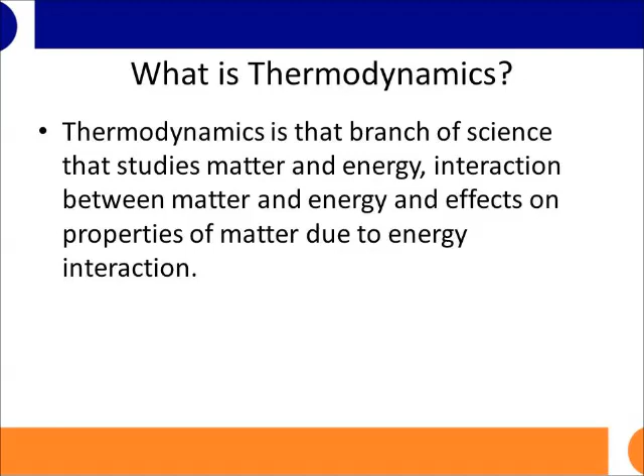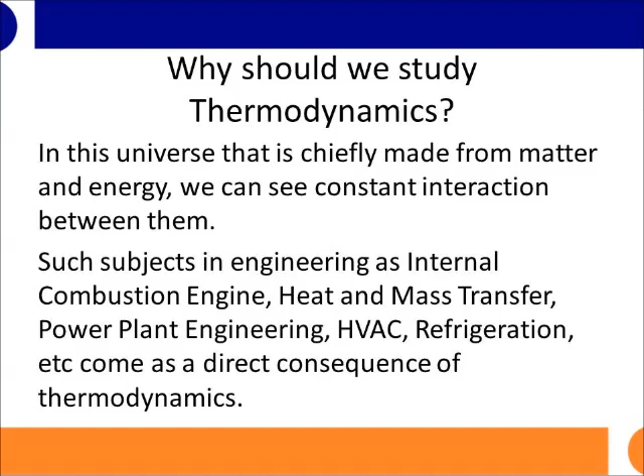Now, why should we study thermodynamics? In this universe, which is chiefly made from matter and energy, we see constant interaction between the two. Subjects in engineering such as internal combustion engines, heat and mass transfer, power plant engineering, heating, ventilation, air conditioning, and refrigeration all come as a direct consequence of thermodynamics.

Thermodynamics plays an important role in design as well, for example the design of thermal insulation, air conditioners, and heaters. When studying thermodynamics, it must be kept in mind that it is not just a theoretical subject, it has direct consequences in designing, such as radiator design, fin design for proper heat transfer in engines, and chiller plants or coolers.

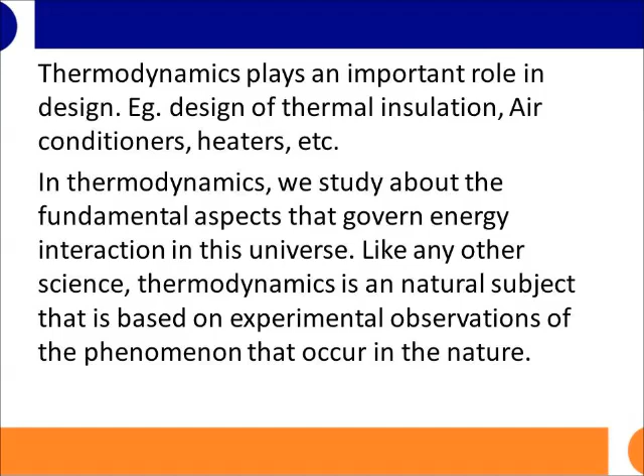So in thermodynamics we study the fundamental aspects that govern energy interaction in this universe. Like any other subject, thermodynamics is a natural subject based on experimental observations of phenomena that happen in nature. These experimental observations are condensed into theories that form the foundation of thermodynamics as well as other allied subjects. So if we master these basic things, it will be very easy to understand other daughter subjects like internal combustion engine and power plant engineering.

So let's begin with the study of the first law of thermodynamics. The first and basic aspect about the universe that an intelligent human must be aware of is that energy in this universe is conserved. Unless destruction of matter takes place, no new energy is created.

This is what Albert Einstein proposed in his theory of relativity. When matter is destroyed, an equivalent amount of energy is created, and if energy is eliminated, an equivalent amount of mass should occur somewhere. That is, mass and energy are interconnected with each other, and both are conserved.

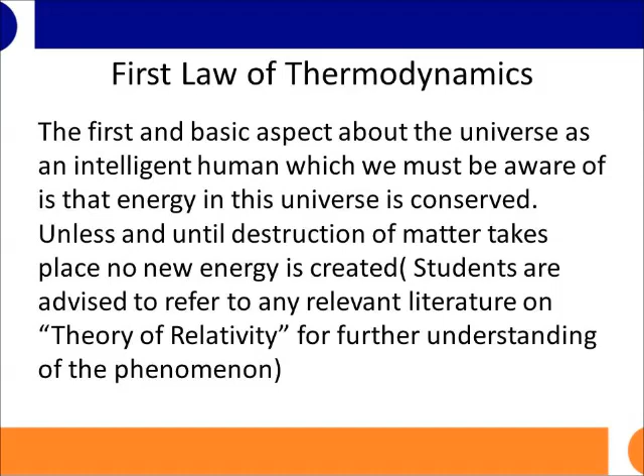So the students are advised to refer to any other relevant literature on the theory of relativity for further understanding, as well as a deeper understanding of the phenomenon.

We have been learning since our smaller classes the law of conservation of energy, which can be stated as energy can neither be created nor destroyed in an ordinary process. It can only be transformed from one form to another, and the total energy content in the universe always remains balanced. There are myriad forms of energy out there, like mechanical energy, electrical energy, nuclear energy, chemical energy, light energy, sound energy, etc.

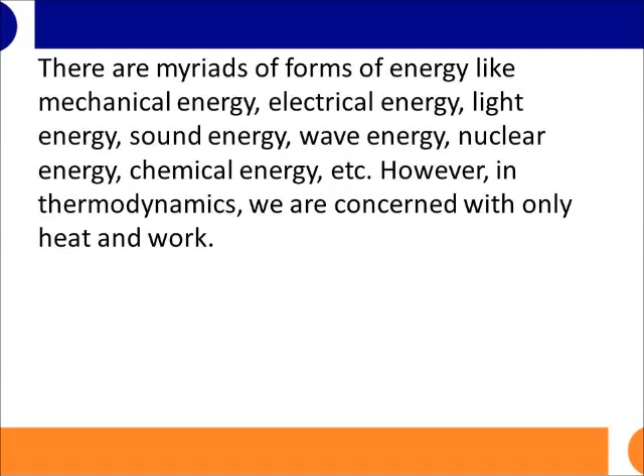But in thermodynamics, our focus will be only on heat energy and mechanical energy in the form of work. Now, the question that should come into our mind is why we are concerned only with heat and work, not any other forms of energy. This is actually the originating factor for thermodynamics, and understanding this, we will get to know why thermodynamics was created first of all.

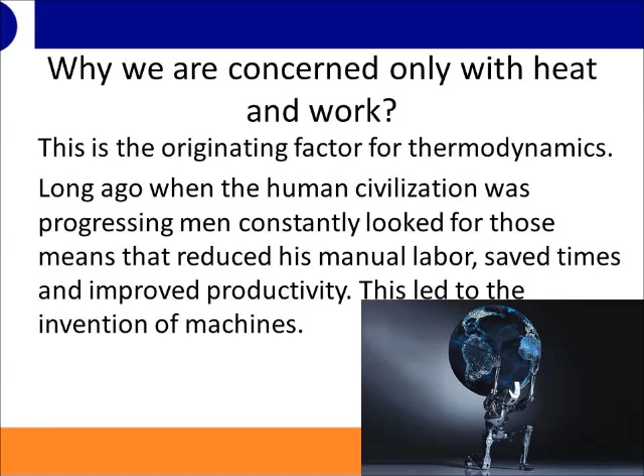Long ago, when human civilization was progressing, men constantly looked for means that reduced manual labor, saved time, and improved productivity. This led men to invent machines. But with the invention of machines, there has been higher output, and man saw that he now has a lot of such product, more than what he actually needed. So now the quest became what to do with the excess of the outputs.

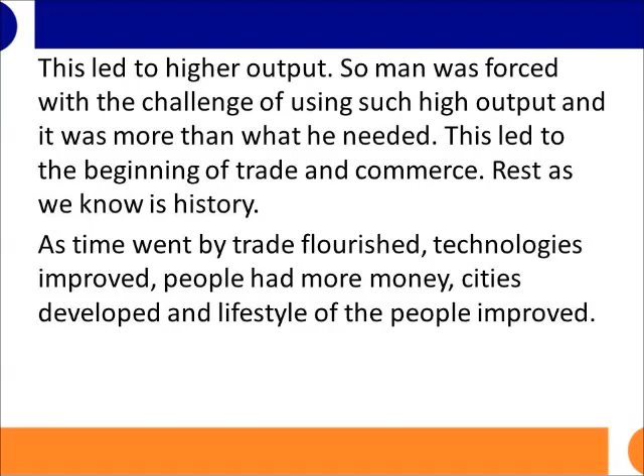This led to the beginning of trade and commerce, and the rest, as we know, is history, so we will not be dealing with that. As time went by, trade flourished, technologies improved, people had more money, cities developed, and lifestyle of the people improved.

Then man came to such a stage that he demanded a technology where the machine works on its own without human intervention. This led to the challenge of finding a suitable source of power, because apart from human intervention, an intelligent machine needs mechanical power provided to it. For example, rotating one of the shafts, giving suitable power - that was one of the needs. So this quest resulted in man observing the amazing power of steam.

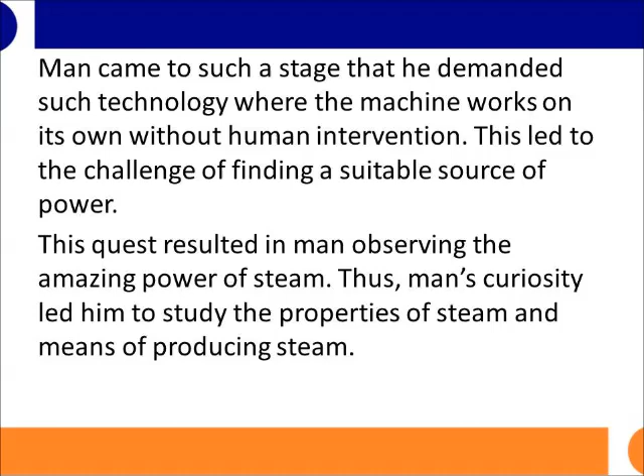Thus man's curiosity led him to study the properties of steam and the means of producing steam. Now, how was steam produced then? Man discovered that when fuel was burned, heat was released, which was used to boil water. This resulted in increased kinetic energy of the steam, and this energy was used to provide rotary power with the help of turbines. Thus was formed the subject matter of thermodynamics.

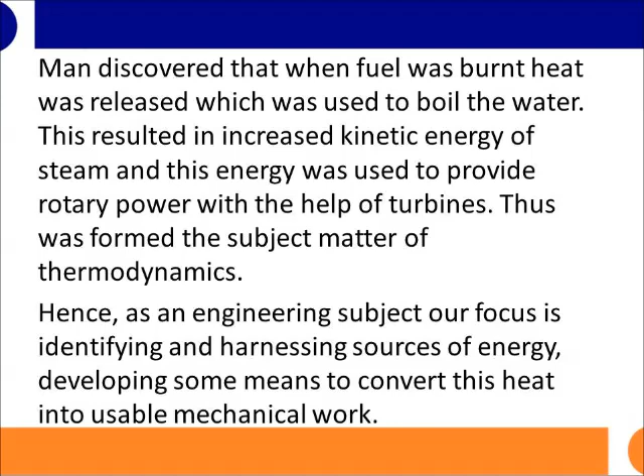Hence, as an engineering subject, our focus is identifying and harnessing the various sources of energy, developing some means to convert this heat into some form of usable mechanical work. Hence, we can observe from the foregoing discussions that we have been listening to so far, there are 4 factors that have been playing in the background.

We are adding heat to something, we are removing heat from something, we are doing work on something, and we are obtaining work from something. So these are the 4 aspects in thermodynamics that guide us in the background. And this something on which we are focusing our attention in thermodynamics is called a thermodynamic system.

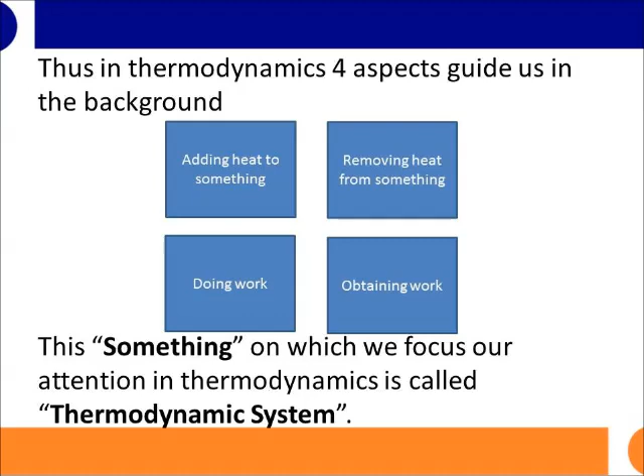So now we will try to understand what is a thermodynamic system. A thermodynamic system is the quantity of matter considered in isolation or as confined in a well-defined space on which we focus our attention and from which the energy interaction takes place. But a system cannot exchange energy in isolation. There should be something else that takes energy from the system and gives energy to the system.

For example, let's consider the first part of the statement: it is any quantity of matter that is considered in isolation. For example, I might be focusing on the energy transfer taking place across the cell membrane in a plasmodium - so a plasmodium can be my system. I'm observing how much heat is transferred through the air conditioner - the air conditioner can be my system. How much heat is transferred by a boiling liquid - so that boiling liquid can be my system, or as confined in a well-defined space.

For example, the fuel contained inside the piston cylinder arrangement, or the fluid which is expanding through the centrifugal pump, etc. So we can have either a system as a standalone or a system which is stored inside some other container. But the system on its own cannot exchange energy in isolation.

There should be something else that takes energy from it, or something that can give energy to it. And this second component is called the surrounding. So let's look at the diagram.

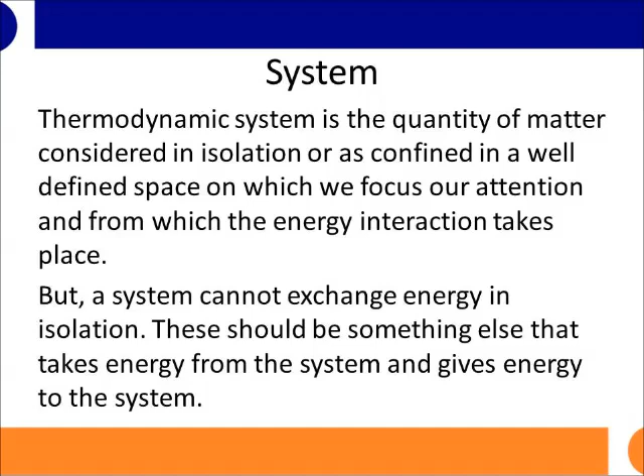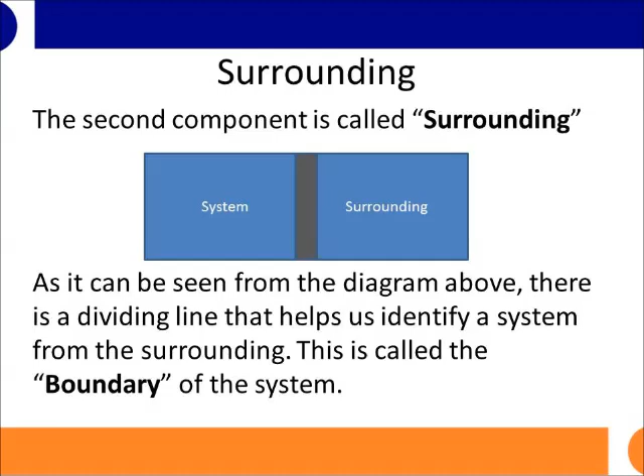As we can see, there's a system and a surrounding, and it is separated by a barrier as shown by the black color. This dividing line that separates the system from the surrounding is called the boundary of the system. But utmost care must be taken while deciding the boundary, because it has been seen that an illogical choice results in paradoxical and hypothetical situations appearing true.

For example, there are many students who used to ask me, suppose a vehicle is traveling with certain speed, and what if we apply the brake? Can the braking energy be converted into some useful energy?

Or yet another theory that most of the students come up with is that suppose the vehicle is running at its full RPM. Consider that we attach a dynamo to the rear axle, so that when the vehicle is being propelled by the energy of the vehicle, the same rotational energy will be equivalently converted into electricity, and it will keep on charging the battery, as if they are creating a system that will perpetually create energy, and a device which forever runs without additional energy.

Such perpetual motion machines, or you can say hypothetical machines, are the result of illogical choices of the boundary.

The boundary of the system does not include the metallic or non-metallic walls of the container in which it is kept. This is because the boundary should not involve any form of heat transfer. The walls of the container, for example the metallic walls, have some thermal conductivity.

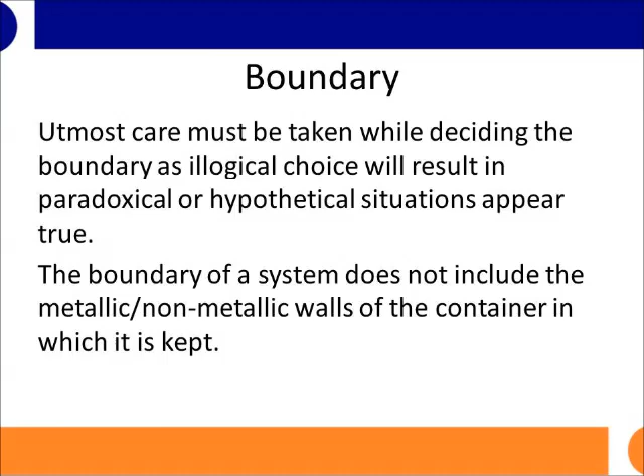So when the working fluid is in contact with the metallic container, it is actually transferring heat to the metallic container. But this is contradictory to our definition that a system exchanges its energy only with its surrounding, not the boundary. So the metallic wall forms a part of the surrounding.

To help us resolve this dilemma, let us now discuss the concept of a working fluid. The working fluid is any liquid, gas, or vapor which is undergoing physiochemical changes inside the container, and as a byproduct of such physiochemical changes, energy is exchanged.

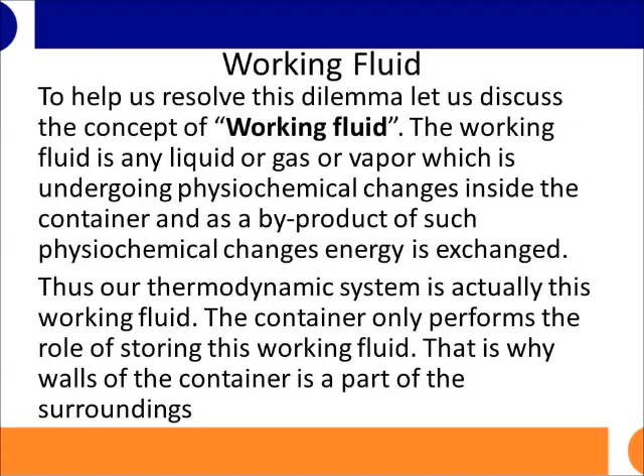Thus, our thermodynamic system is actually this working fluid. The container only performs the role of storing the fluid. That is why the walls of the container form a part of the surrounding.

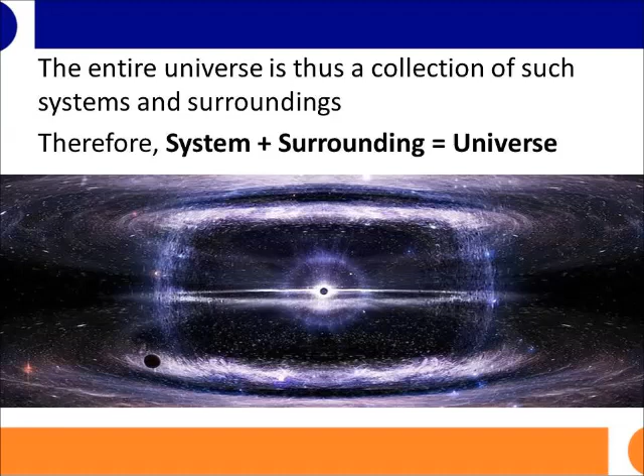Hence, if you look around in this universe, there are collections of such systems and surroundings. System plus surrounding together forms the universe.

Now, let us delve into the mathematical concepts. As with any other science, thermodynamics also has its fair share of rigorous mathematical calculations. There are formulas and derivations, but these formulas and derivations are not made just for their mathematical beauty. Each symbol and the sign convention, whether it is positive or negative, has a physical meaning.

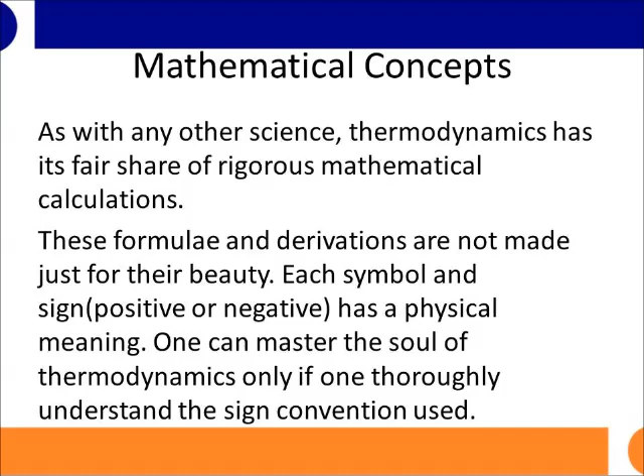One can master the soul of thermodynamics only if you are thoroughly aware of these sign conventions used. The second dilemma which I always observe in students is that they make huge mistakes in these sign conventions, and even after going through various literatures, I also observed that there are two types of sign conventions used, and however only one of them is explained, and why the second sign convention came, nobody explained in the literature, as a result of which students get confused and make wrong answers.

So as part of this video lecture, I would like to discuss these two sign conventions involved, and I am pretty sure after going through this you will not find thermodynamics difficult anymore, and I am pretty sure you will actually start enjoying thermodynamics.

Now, the two sign conventions used in thermodynamics are sign conventions from the point of view of a scientist in thermodynamics. Let us now consider, if we are a researcher in thermodynamics, if we are delving deeper into the subject matter, what would our focus be on?

Any interaction that results in the increase of the internal energy of the system is taken positive. Now, what is internal energy? Every object, every matter in this universe has some energy of its own. You can say this energy is the result of the molecules which are there in its natural state.

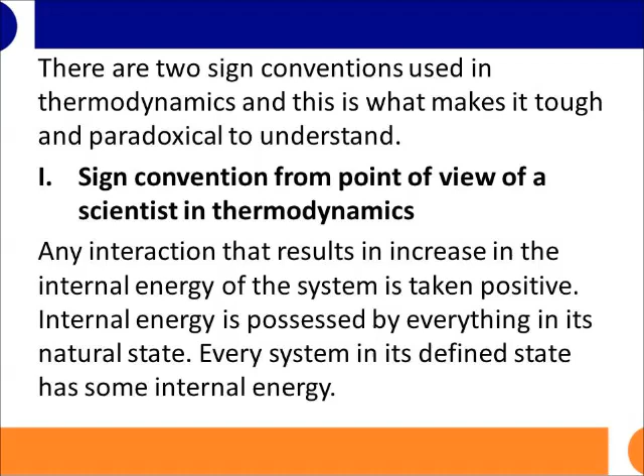Every system in its defined state has some internal energy. If we are adding heat and doing work, there will be an increase in the internal energy of the system. Hence, heat added to the system is positive, and work done on the system is positive.

Whereas if I am removing heat from the system, or making the system do some work, there is a decrease in the internal energy. Hence, heat removed from the system is negative, and work done by the system is negative.

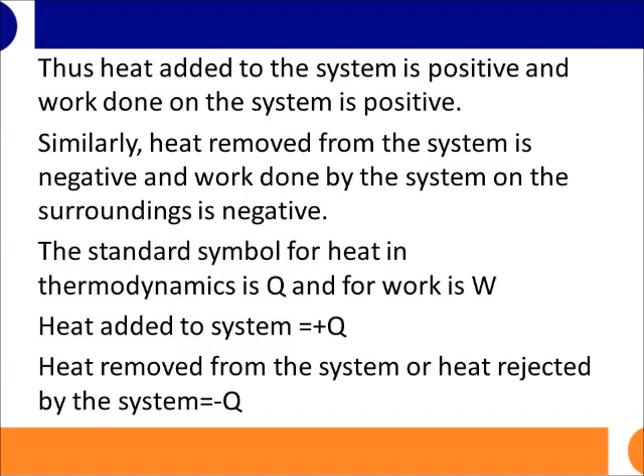The standard symbols for heat in thermodynamics is Q, and for work it is W. Hence, heat added to the system is plus Q, heat removed or rejected by the system is minus Q, work done on the system is plus W, and work done by the system is minus W.

Now, the second sign convention. Actually, this second sign convention is from the point of view of an engineer.

The main focus of an engineer is designing a power producing system. Thus, power produced by a system is taken as positive and power consumed by the system is taken as negative. Work output from a system is taken as positive and work input to the system is taken as negative.

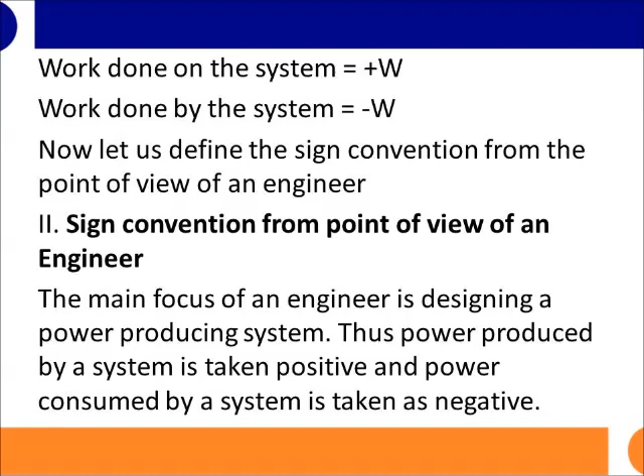Let us try to understand this in detail. As mentioned earlier, in thermodynamics we take either a liquid, vapor or gas as the working fluid. Hence, our system will comprise a closed chamber with a movable piston for the transfer of work and a conducting wall for the transfer of heat. Consider that a fluid is contained in the cylinder.

Let the piston be given a displacement of L meters to the right, thereby compressing the fluid. Let us assume the area of the piston is A meter square. We know that pressure is given as force upon area. Also, work is defined as the product of force and displacement.

Here the force is because of pressure, hence it is also called pressure force. Thus work is pressure into area into length, but from elementary mathematics we know area into length is volume, hence work is pressure into volume.

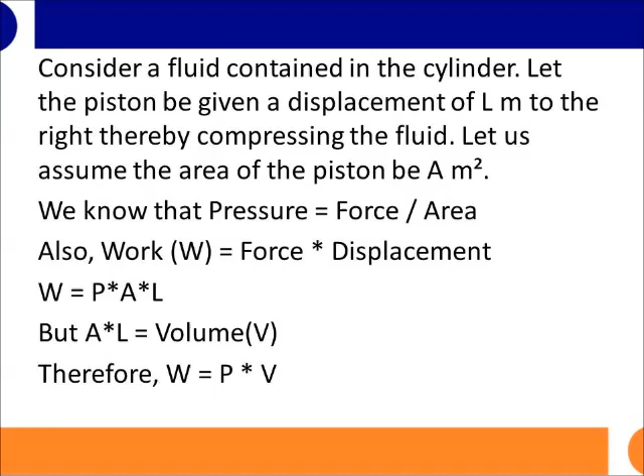Let us now consider a differential work dW corresponding to a differential displacement dl. Therefore dW is equal to p dV. Also, let us consider the system is moved from state 1 to state 2. Thus the total work done in moving the system from state 1 to state 2 is given as W equals the integral from 1 to 2 of p dV.

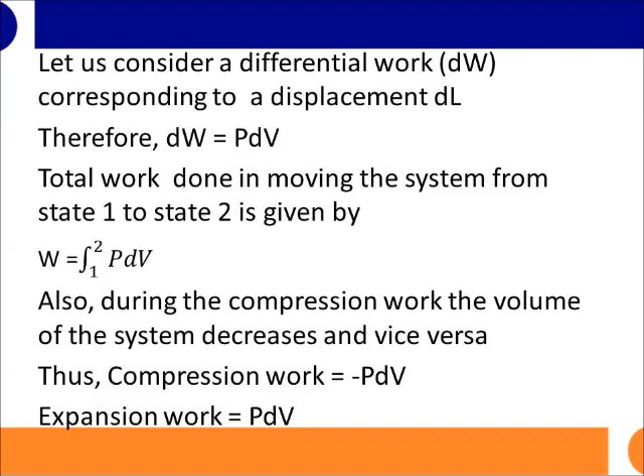It can be seen that during compression the volume of the system decreases, and during expansion the volume of the system increases. Thus compression work is given as minus p dV and expansion work is given as plus p dV. Hence, whenever you come across the term minus p dV in the literature, it is in the sense of work input as given by a compressor or a pump, from the point of view of an engineer.

Now since we are aware of the two sign conventions, let's review it briefly once more. If we are talking of change in internal energy, then we should use the sign convention that heat input to the system is plus Q, heat output is minus Q, work input to the system is plus W, and work output from the system is minus W.

Whereas if we are talking of a power producing system, for example an engine or a power plant, and we are talking of work done by the compressor or work done by a pump, here we will be using the term minus p dV. So I hope these two sign conventions are now clear.

Understanding these two sign conventions and the defining philosophies will help avoid complications in the study of thermodynamics. In the next lecture we will discuss more about what a system is, the different types of systems, and other elementary aspects, as well as rigorous mathematical calculations and derivations of some equations, including the equations of ideal gas, etc.

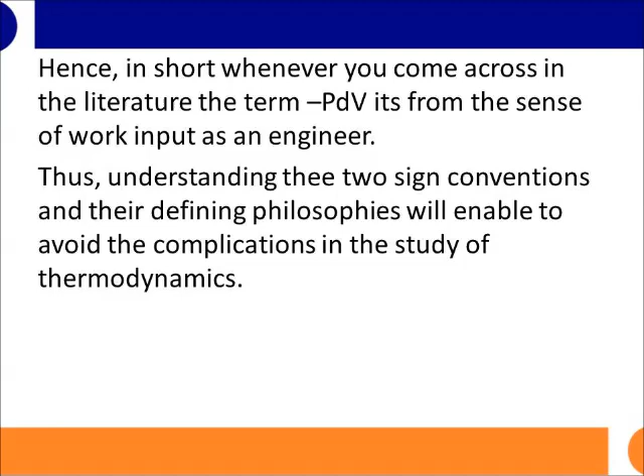And if possible, during these video lectures I will also try to discuss some numerical questions and explain how to solve them using the various equations. Thank you.